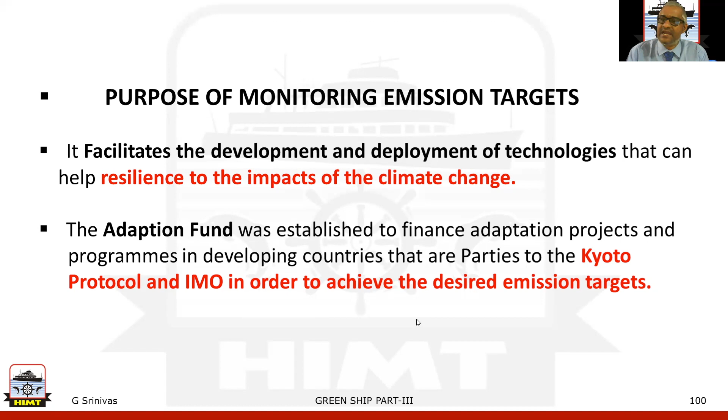Greenhouse effect solution - so what is the solution? How do we reduce this greenhouse effect? Reducing greenhouse gas emissions will require significant effort at the international, national, and local levels. First and foremost, we must slash fossil fuel production, consumption, and pollution by ramping up our use of clean, future marine fuels, renewable energy, and energy efficient technologies, and by investing in fuel efficient and electric vehicles.

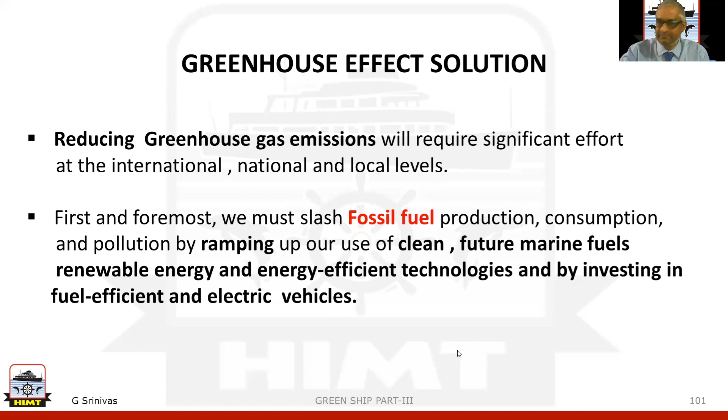Here vehicles refers to ships. So we must end fossil fuel subsidies and better leverage cap and invest programs, carbon pricing and carbon capture, which includes storage and utilization technologies that catch the carbon dioxide from emission sources like power plants or directly from the air, and permanently bury it underground or in the seabed, or convert it into other materials. As individuals, we must commit to cutting carbon in our daily lives.

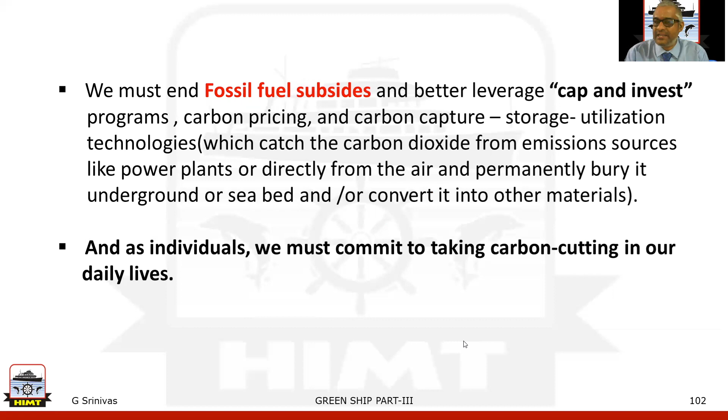Here you can see an image of carbon capture. CO2 is captured and then transported through pipelines from the vessel and permanently stored under the seabed. It is stored permanently in reservoirs around 1000 to 2000 meters below the seabed.

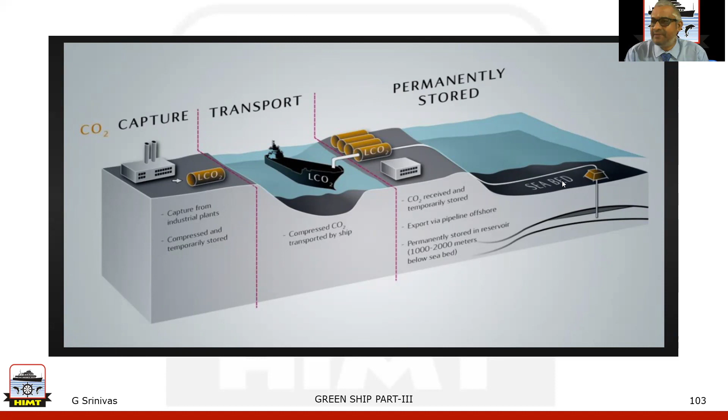The solutions above for greenhouse gas emissions are required to achieve objectives as per the Intergovernmental Panel on Climate Change, IPCC: decrease greenhouse gas pollution by 45% from 2010 levels by 2030, and reach net zero emissions by the year 2050. As per the IMO, International Maritime Organization, agreed in April 2018, the drafted greenhouse gas strategy aims to decrease carbon intensity by 40% by 2030, pursuing efforts towards 70% by 2050, and 50% annual greenhouse gas reduction by 2050. These are the objectives as per the IPCC and IMO.

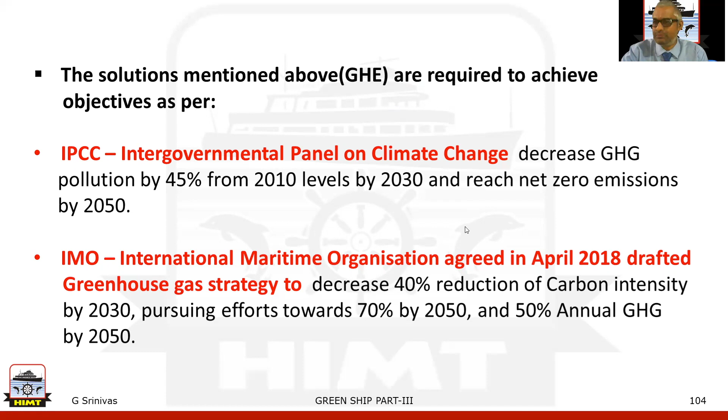IMO levels of ambition. IMO's initial strategy identifies levels of ambition for the international shipping sector, noting that technological innovation and the global introduction of alternative fuels and energy sources for international shipping will be integral to achieving the overall ambition. The reviews should take into account updated emission estimates, emission reduction options for international shipping, and the reports of the IPCC as relevant.

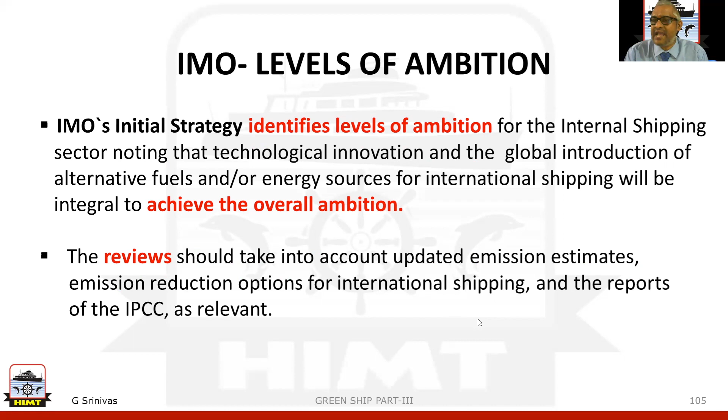Levels of ambition directing the initial strategy are as follows. Number 1: carbon intensity of the ship to decline through implementation of further phases of the EEDI for new ships, to be reviewed with the aim to strengthen the energy efficiency design requirements for ships, with percentage improvement for each phase to be determined for each ship type as appropriate. As we all know, during the MEPC 76 session, held in June 2021, the phases regarding the EEDI have been implemented.

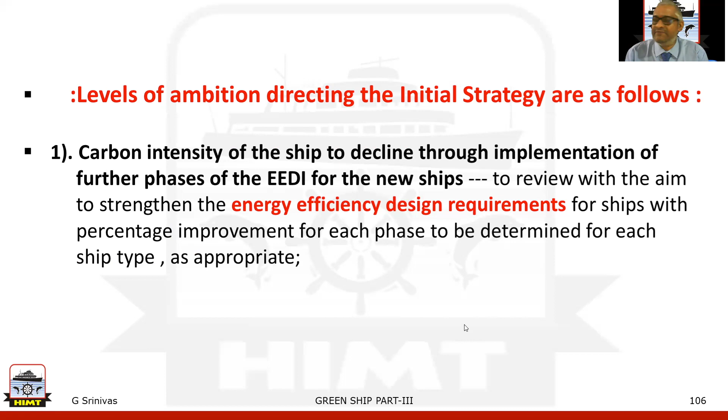Which year it has been implemented, we'll see in the coming slides. Number 2: carbon intensity of international shipping to decline, to reduce carbon dioxide emissions per transport work as an average across international shipping by at least 40% by the year 2030, and pursuing efforts towards 70% by 2050, compared to 2008.

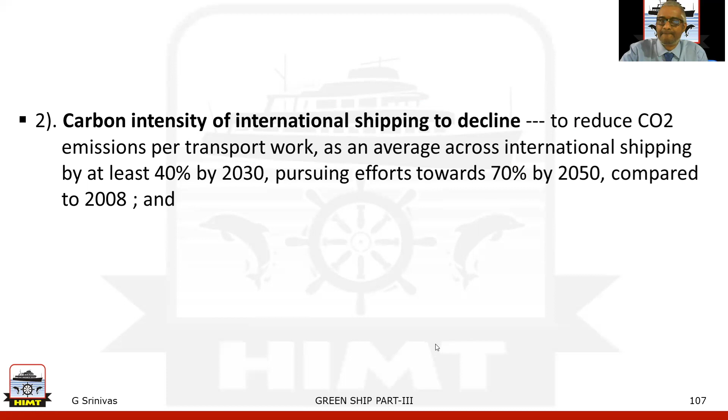Third, greenhouse gas emissions from international shipping should peak and decline: to peak as soon as possible and reduce total annual greenhouse gas emissions by at least 50% by 2050 compared to 2008, while pursuing efforts towards phasing them out, as called for in the vision, as a point on a pathway of CO2 emissions reductions consistent with the Paris Agreement temperature goals.

So what is the vision? IMO remains committed to reducing greenhouse gas emissions from international shipping and, as a matter of urgency, aims to phase them out as soon as possible.

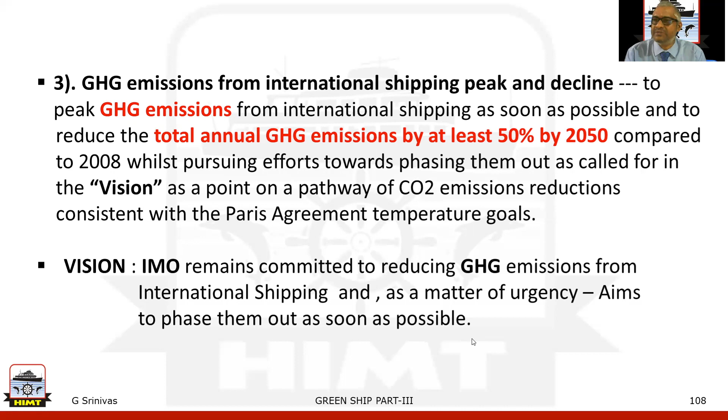So what is business as usual emissions? The Intergovernmental Panel on Climate Change defined a business-as-usual baseline case as the level of emissions that would result if future development trends follow those of the past and no changes in policies take place. So basically, business as usual means no policies are taken into account and no innovative technologies are implemented.

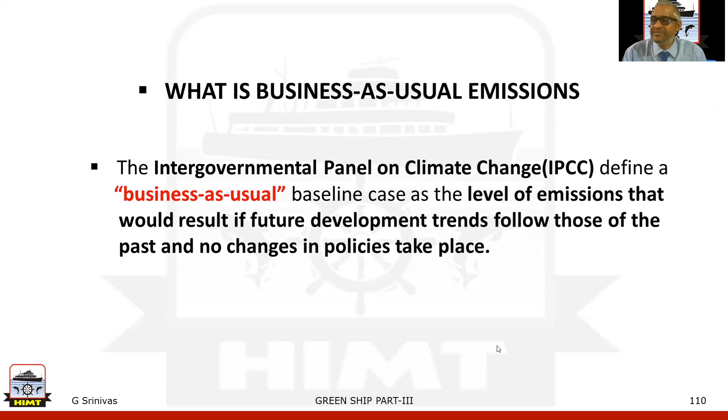So what will be the future emissions? Under IPCC business-as-usual emissions of greenhouse gases, there is a rate of increase of global mean temperature during the next century of about 0.3 degrees centigrade per decade. This is greater than that seen over the past 10,000 years.

The scenario in developing countries has been a debate issue in climate change negotiations. Such a definition will lead to an underestimation of business-as-usual emissions of developing countries, and thus an underestimation of mitigation efforts. If mitigation efforts have not been implemented for the reduction of CO2 emissions, then business-as-usual emissions will gradually increase.

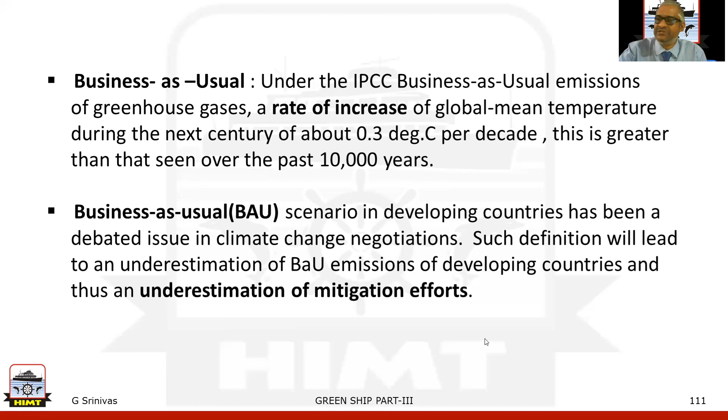The business-as-usual pathway CO2 emissions from international shipping under the strategy is shown in the figure, and compared to the business-as-usual emissions pathway, a range of emission pathways are possible under the IMO's initial strategy.

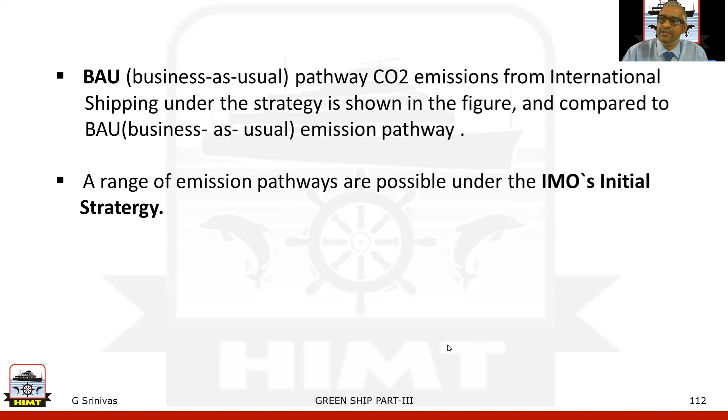So here you can see the figure. The y-axis is carbon dioxide in million tons per year, and the x-axis is years from 2010 to 2075. The black line represents business-as-usual emissions of carbon dioxide, at 101 gigatons.

With respect to the blue and green lines: the blue line represents the IMO's initial greenhouse gas strategy minimum ambition, at 40 gigatons, and the maximum ambition is about 28 gigatons.

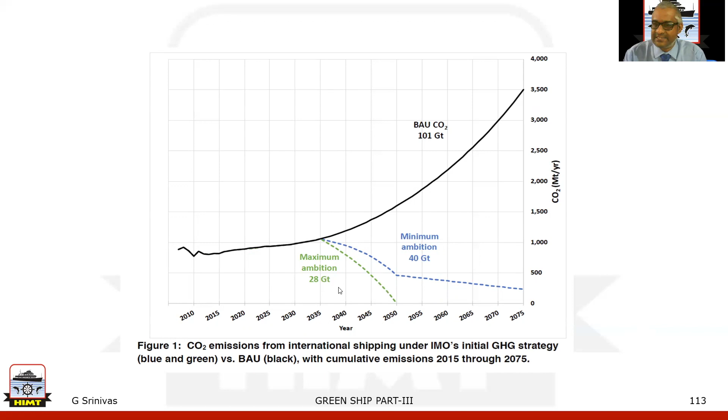As we have seen in the figure, the blue line is the minimum ambition implied by the strategy, and it reflects a 40% carbon intensity reduction by the year 2030.

The green line is the maximum possible ambition implied by the strategy. It's driven primarily by the goal to pursue phasing out greenhouse gas emissions from international shipping at a pace consistent with the Paris temperature goals.

So basically, the blue and green lines represent the IMO's initial strategy and levels of ambition, and the green line is the vision of the IMO.

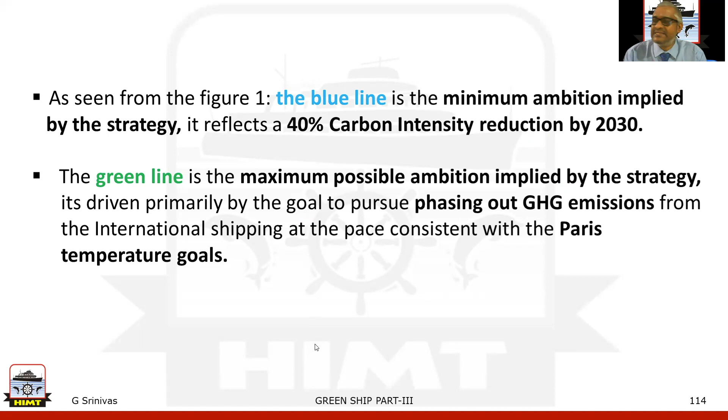The strategy implies cumulative CO2 emissions of between 28 to 40 gigatons from international shipping from 2015 to 2075, compared to business as usual of more than 100 gigatons over the same period. This is the reason why the IMO has taken action for the reduction of greenhouse gas emissions, and various technologies are there.

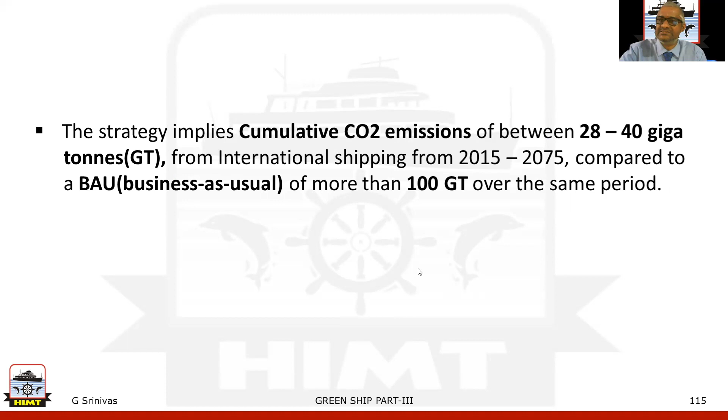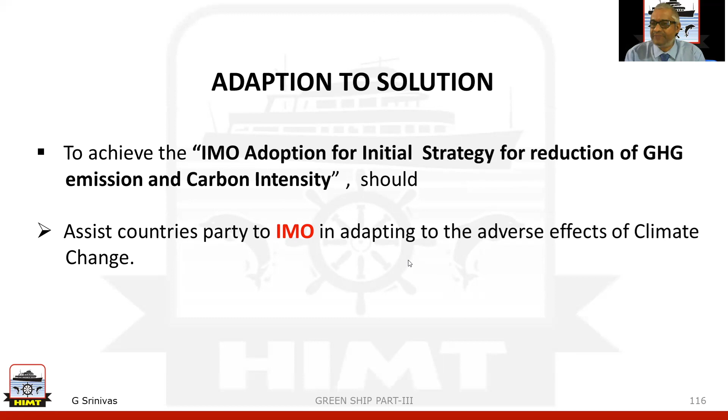In adopting solutions to achieve the IMO's initial strategy for the reduction of greenhouse gas emissions and carbon intensity, countries party to IMO should be assisted in adapting to the adverse effects of climate change, facilitating the development of new programs and deploying new technologies that can help increase resilience to the impacts of climate change, and to achieve the desired objectives of the IMO initial strategy on reduction of greenhouse gases and carbon intensity.

So new programs and technologies developed for the reduction of greenhouse gas and carbon intensity, and to reach zero emissions, are as follows: number one, a wide variety of design, operational, and economic solutions, which includes a combination of design, operational, and economic solutions particularly for the shipping sector; number two, various green technologies; number three, compliance and enforcement factors, which contribute to lower fuel cost and energy savings.

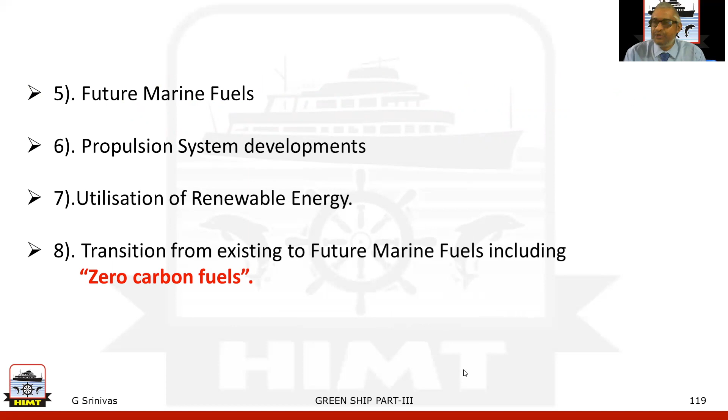Number four, adopting methods to improve propulsion efficiency. Number five, future marine fuels. Number six, propulsion system developments. Number seven, utilization of renewable energy. And number eight, the last one, transition from existing to future marine fuels, including zero-carbon fuels. We will discuss all these eight points later.

Innovative technologies, calculation of efficiency and verification. The verification of innovative energy efficiency technology is a complex process as documented in the IMO guideline. This is an interim guidance document, expected to evolve over time with experience gained from using these technologies.

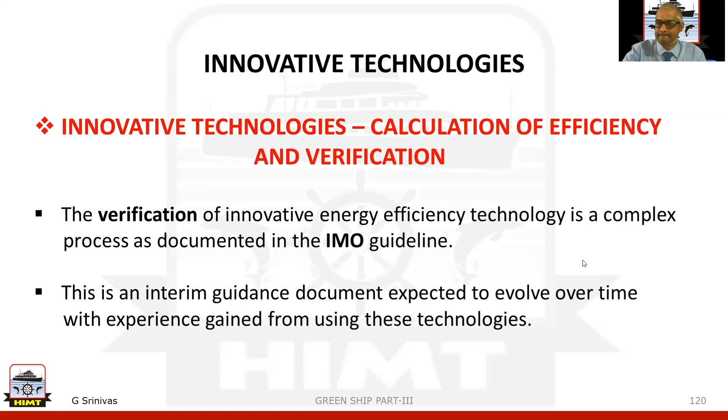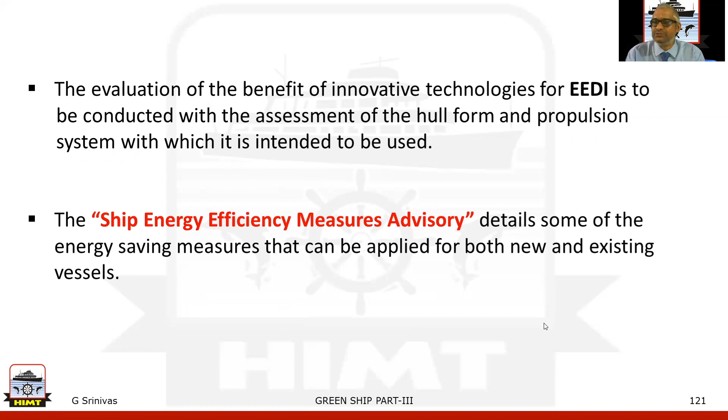The evaluation of the benefit of innovative technologies for EEDI is to be conducted with the assessment of the hull form and propulsion system with which it is intended to be used. And the ship energy efficiency measures advisory details some of the energy saving measures that can be applied for both new and existing vessels.

Potential energy savings are estimated in terms of reductions in engine specific fuel consumption, reduction in propulsion fuel consumption, and reduction in overall vessel fuel consumption. So that is the potential energy savings. And these estimates are based on values derived from vendor and manufacturer claims, industry reports, practical operating experience, and engineering review.

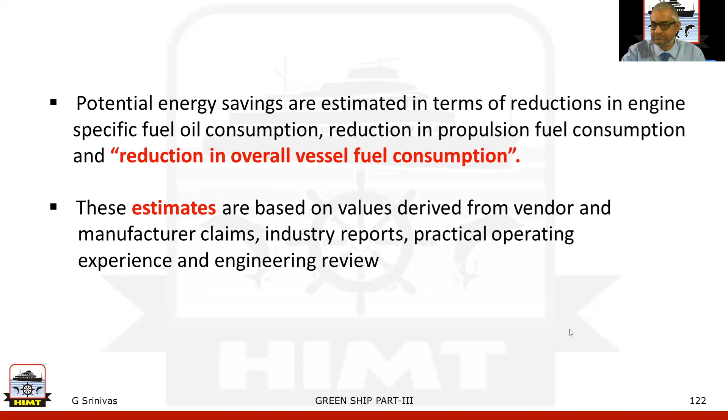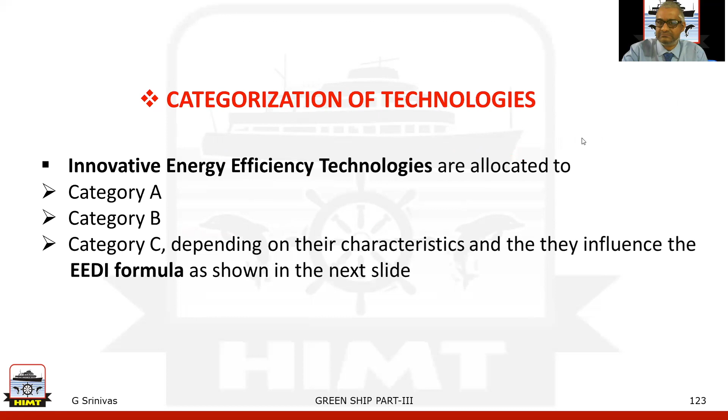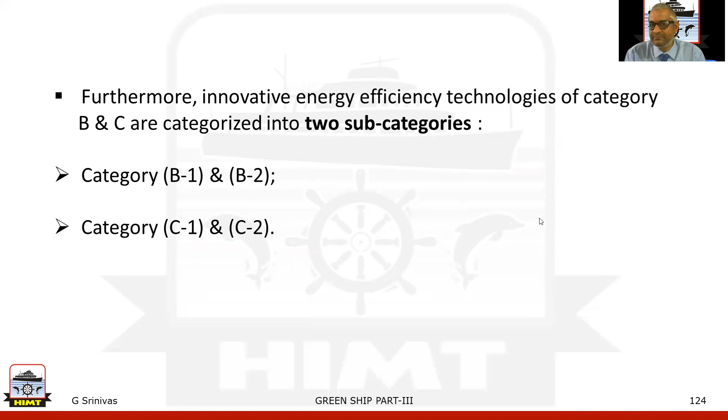So the innovative technologies are categorized into category A, category B, and category C, depending on their characteristics and how they influence the EEDI formula. Furthermore, innovative energy efficiency technologies of category B and C are again categorized into two subcategories: category B into B1 and B2, and category C into C1 and C2.

Category A technologies directly influence and shift the ship's speed power and can change the combination of propulsion power and the reference speed. For example, technologies at constant reference speed can lead to a reduction of propulsion power, or for a constant propulsion power that could lead to an increased reference speed.

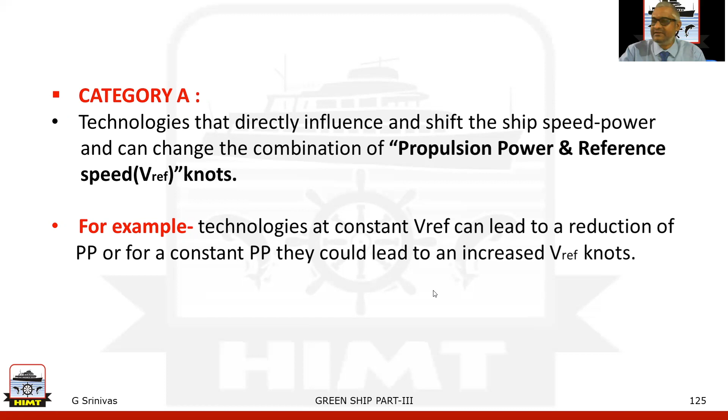These categories cover ESDs, that is energy saving devices, such as pre-propeller fins, ducts, post-swirl stators, rudder fins, and combinations of them, along with low friction coatings, and hull, propeller, rudder optimization efforts that directly impact the ship's hydrodynamic performance.

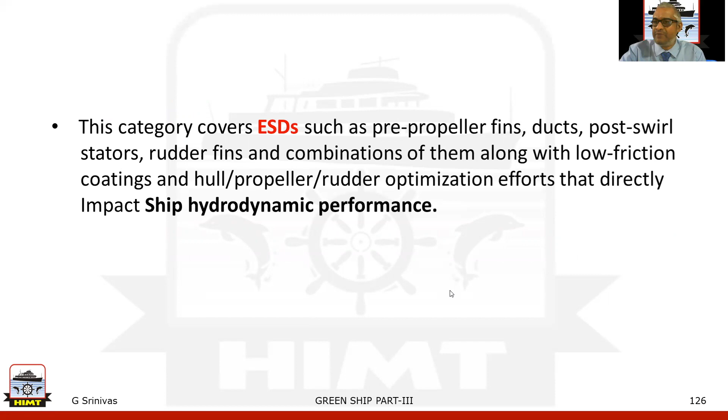Category B, commonly known as fifth term technologies, reduce propulsion power at a reference speed but do not generate electricity, and the saved energy is counted as P efficiency.

Category B1: technologies which can be used at all times during the operation, for example hull air lubrication, and thus the availability factor should be treated as 1.0. So the saved energy, P efficiency in kW, indicates 75% of the installed power for which innovative technology contributes to ship propulsion.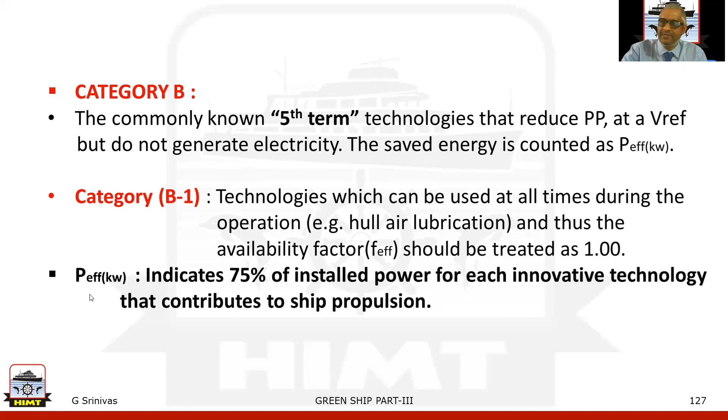Category B2: technologies which can be used at their full output only under limited conditions and periods, for example wind power, and the setting of availability factor should be less than 1.0.

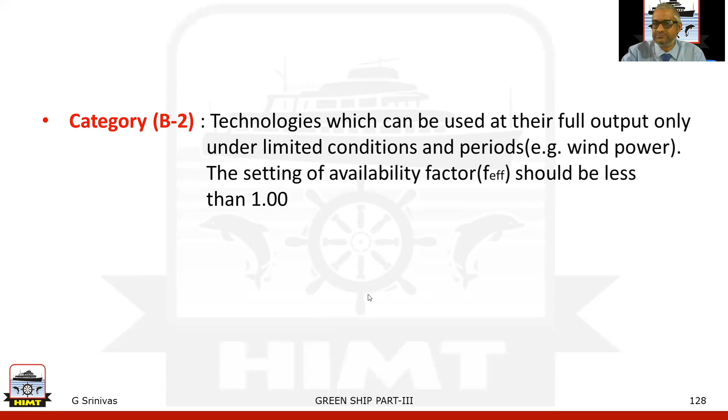Category C, commonly known as fourth term technologies, generate electricity, and the saved energy is counted as auxiliary power reduction due to use of innovative electric power generation technologies.

Category C1: technologies which can be used at all times during the operation, utilizing waste heat recovery, and thus the availability factor should be treated as 1.0.

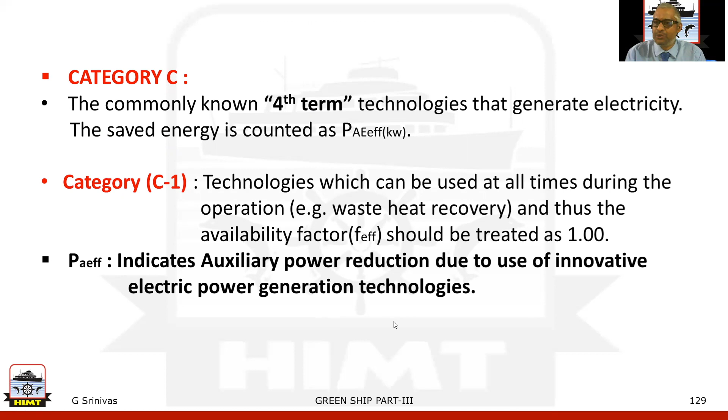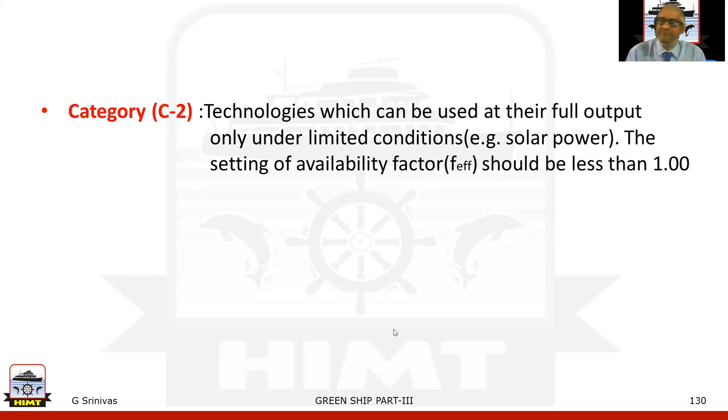Category C2: technologies which can be used at their full output only under limited conditions, for example solar power, and the setting of availability factor should be less than 1.0.

Here you can see the innovative energy efficiency technologies EEDI formula. EEDI is equal to main engine emissions plus auxiliary engine emissions plus shaft motor emissions, minus fourth term efficiency technologies, minus fifth term efficiency technologies, divided by the cargo transport.

Here you can see in the table the various innovative technologies divided into category A, B, and C. Each entry in the table formula is color coded, corresponding to these color codes. Whichever color codes are red will indicate over here, and whichever are blue will be applicable over here. Same with the one in gray, fifth term efficiency technology: air lubrication and wind propulsion. And the shaft motor emission minus fourth term efficiency technologies are in black: waste heat recovery and solar power.

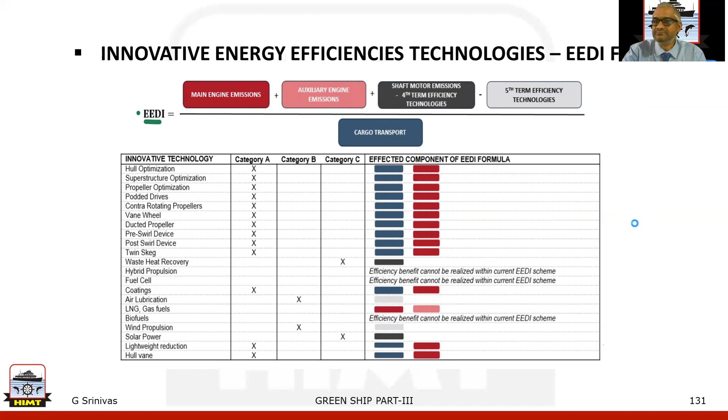Highlighting the various innovative technologies and solutions adapted for the reduction of greenhouse gas emissions. Number one, wide variety of design, operational and economic solutions for greenhouse gas reduction potential.

Achieving the goals of the initial IMO greenhouse gas strategy will require a mix of technical, operational and innovative solutions applicable to ships. Some of them, along with an indication of their approximate greenhouse gas reduction potential, are highlighted as given.

5 to 15% from power and propulsion systems, and 5 to 50% from fleet management, logistics and incentives, 1 to 10% from voyage optimization, 2 to 50% from concept, speed and capability, 50 to 90% from fully electric.

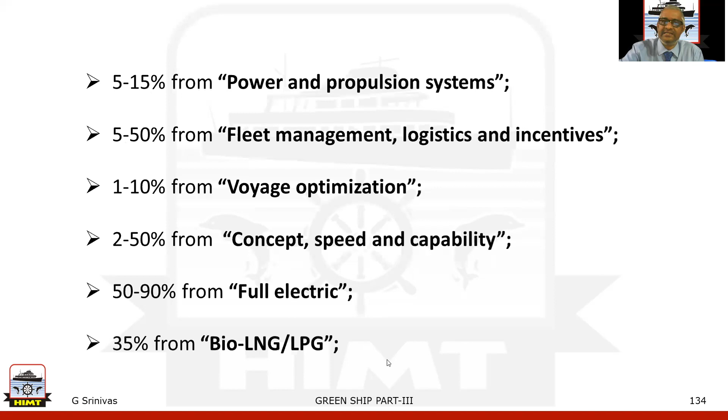35% from bio, LNG and LPG, 90% from third generation biofuel, and 80 to 100% from hydrogen and other synthetic fuels, 1 to 10% from energy management, 2 to 20% from hull and superstructure, and up to 75% from extensive speed optimization. So all these percentages represent a combination of technical, operational and innovative solutions.

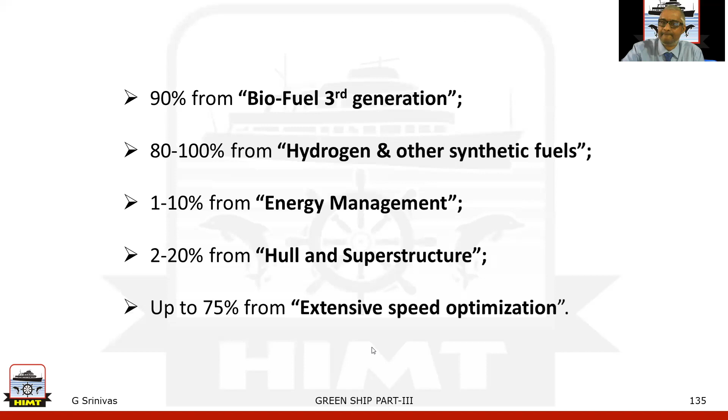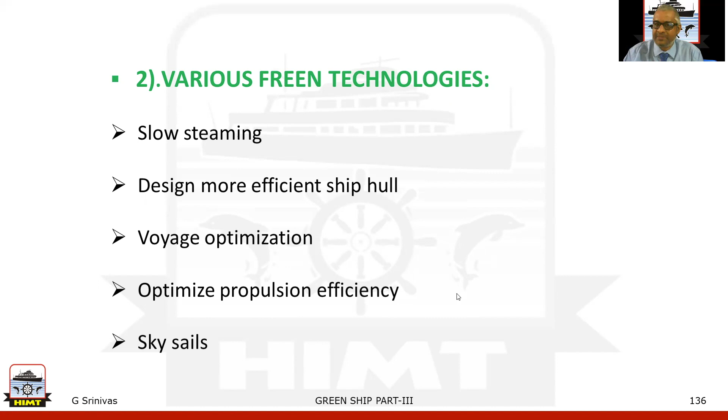Second one, various green technologies: slow steaming, designing more efficient ship hulls, voyage optimization, optimizing propulsion efficiency, and sky sails.

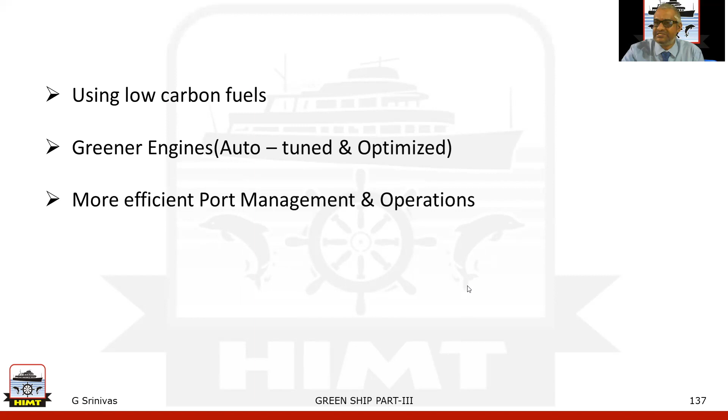Waste heat recovery systems, scrubbing towers, use of marine fuel with low sulfur content, IMO compliant. Scrubbing towers will be used in case you are using fuel with sulfur content of 3.5%.

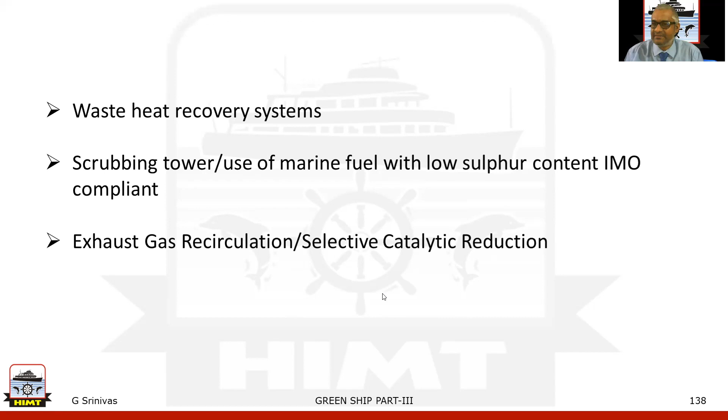Exhaust gas recirculation and selective catalytic reduction for the reduction of NOx, trim optimization, cooling systems, advanced turbochargers, advanced propulsion systems, and renewable energy.

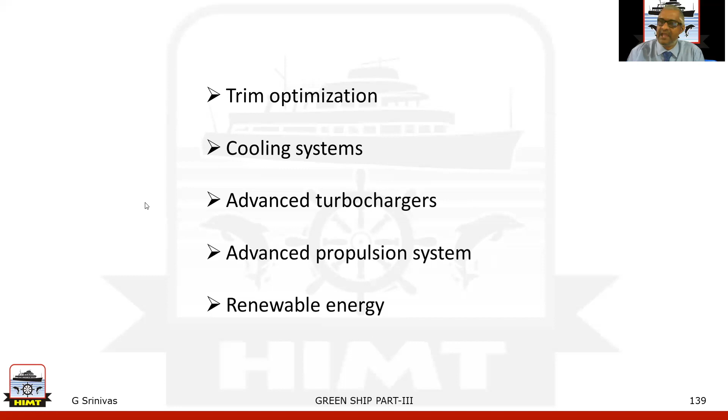Number 3, compliance and enforcement factors contributing to lower fuel cost and energy savings. First one is hull condition.

Control of the factors given below can give fuel optimization up to 7%. The factors are vessel size, hull fouling, hull damage, and hull paint.

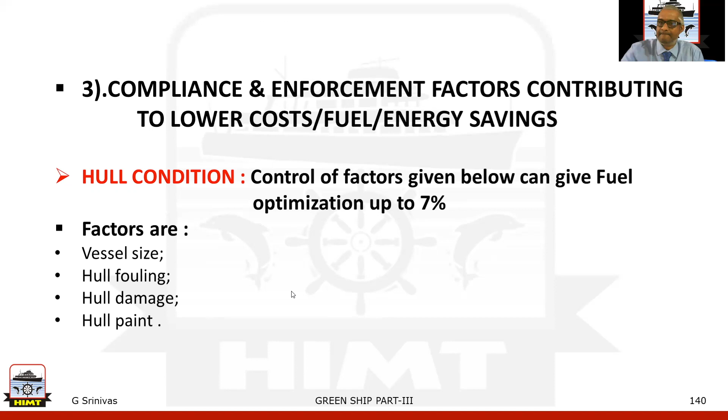Engine condition. Control of the factors given below can give fuel optimization up to 5%. The factors are shaft, engine fuel consumption, revolutions per minute, thrust, and fuel rate.

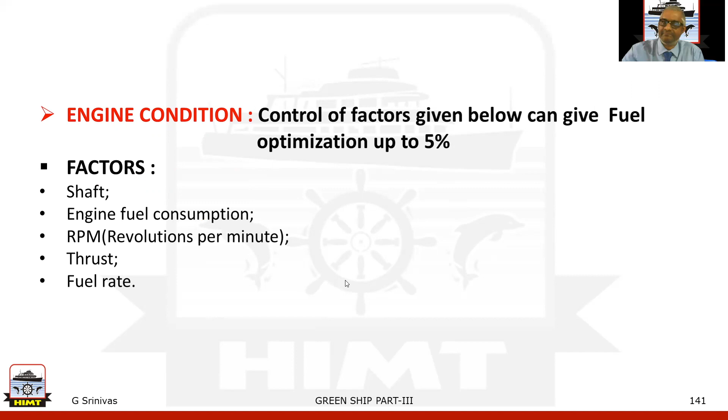Trim and draft. Monitoring of the factors given below will provide up to 5% fuel savings. The factors are draft, trim, and stability.

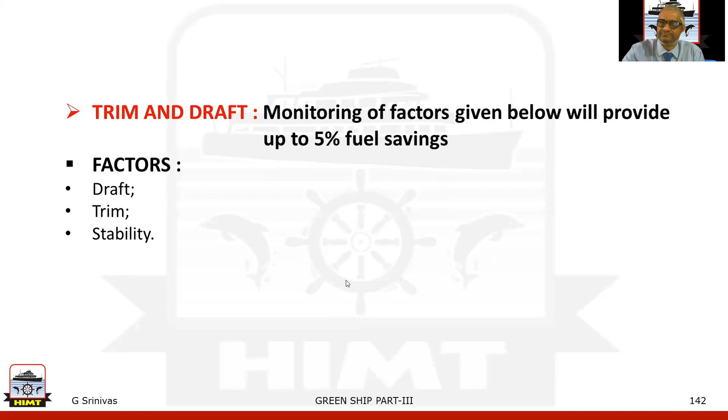Weather conditions. Route planning based on weather conditions will give up to 3% optimization. The factors are air and water temperature, cloud cover and ice cover, humidity, current speed and direction, gust, swell direction, swell height and period, wave direction, visibility, and sea level.

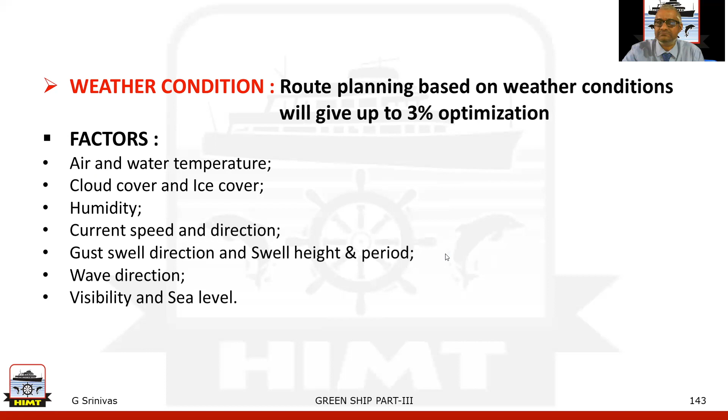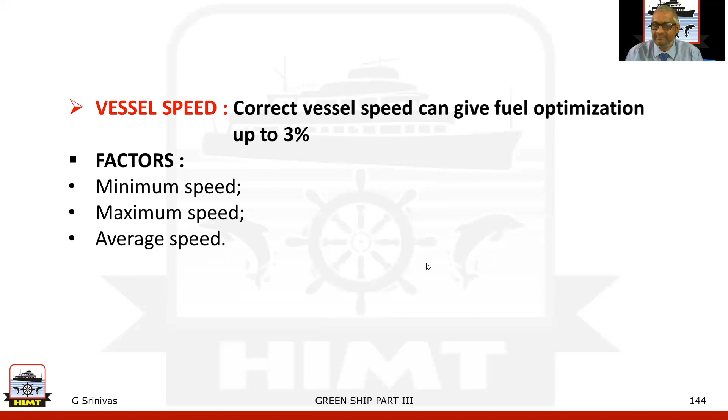Vessel speed. Correct vessel speed can give fuel optimization up to 3%. The factors are minimum speed, maximum speed, and average speed.

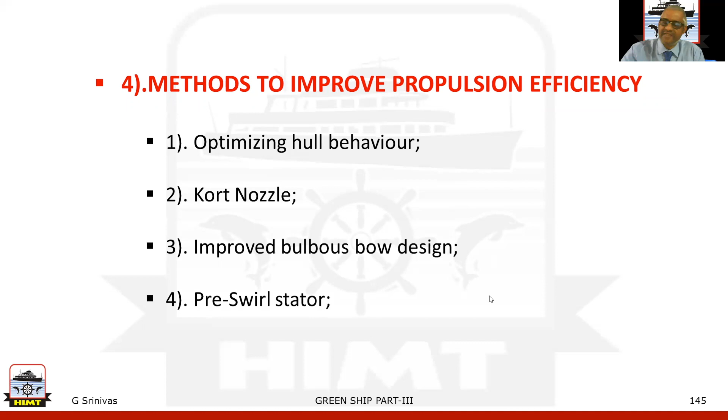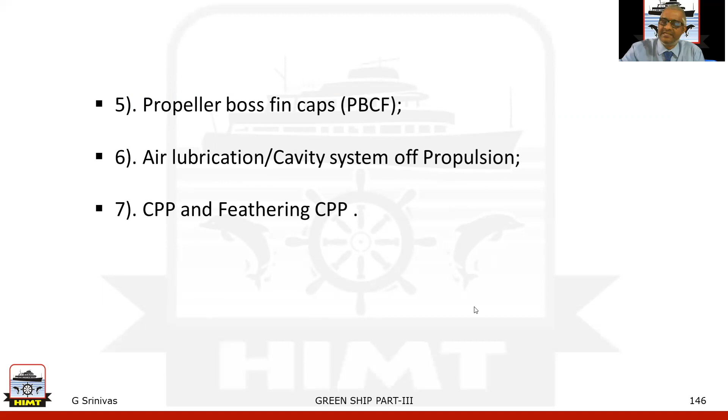Number 4, methods to improve propulsion efficiency: optimizing hull behavior, Kort nozzle, improved bulbous bow design, pre-swirl stator, propeller boss cap fins (shortly known as PBCF), air lubrication or cavity system of propulsion, CPP and feathering CPP, controlled pitch propeller.

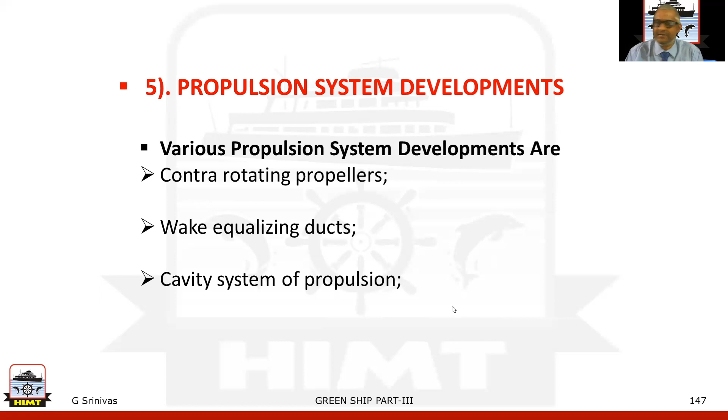Number 5, propulsion system developments: contra-rotating propellers, wake equalizing ducts, cavity system of propulsion, water jet propulsion, electric propulsion, and power take-off and power take-in systems in conventional diesel-electric propulsion.

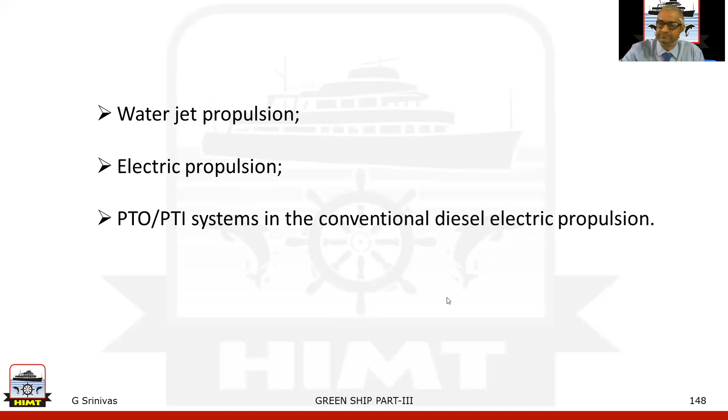Number 6, various renewable energy: marine solar power system, harnessing wind and solar power concept, fuel cell propulsion. Types of fuel cells are alkaline fuel cell, proton exchange membrane fuel cell, direct methanol fuel cell, phosphoric acid fuel cell, molten carbonate fuel cell, and solid oxide fuel cell. The final one is hydrogen and fuel cell.

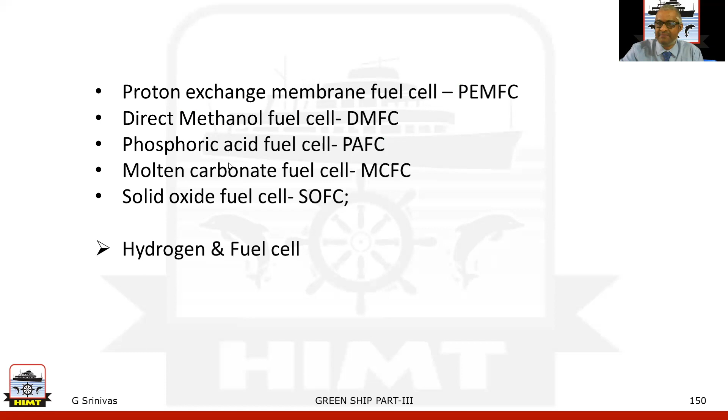All these—proton exchange membrane, direct methanol fuel cell, phosphoric acid fuel cell, solid oxide fuel cell, and alkaline fuel cell—all come under the category of types of fuel cells.

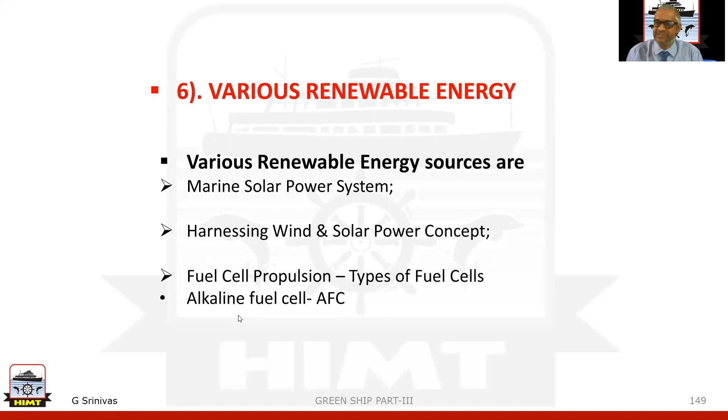Number 7, transition from existing to future fuels. Putting shipping into the wider energy context as we transit to alternative energy sources and technologies, evolving from well-to-wake to blade-to-wake and wave-to-wake.

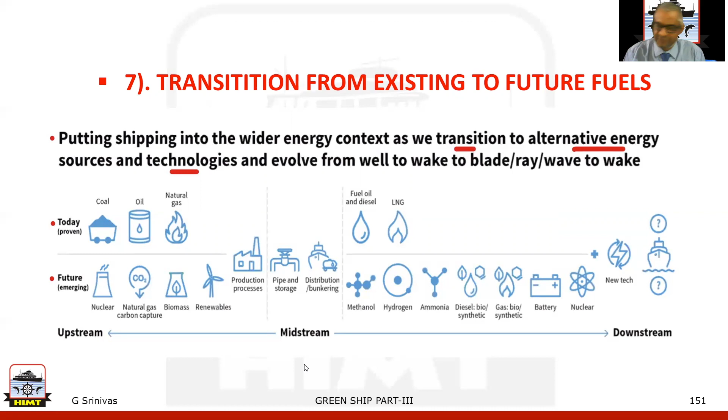Number 8, future marine fuels, pathway to decarbonization. IMO has developed a target of a minimum 50% reduction in greenhouse gas emissions by the year 2050. Ship owners have alternate fuel options to help them meet IMO's ambitions, each with its own advantages and challenges.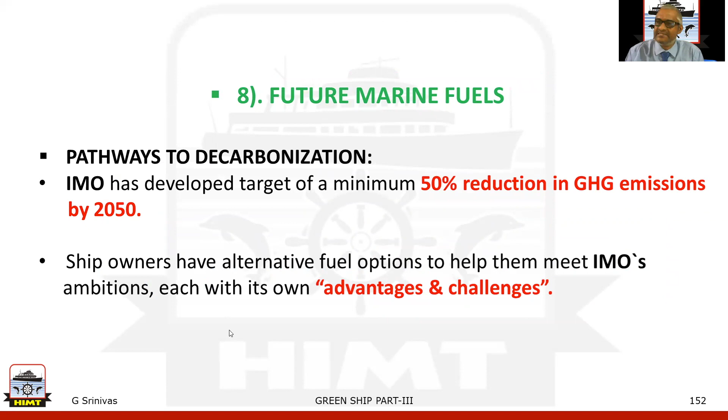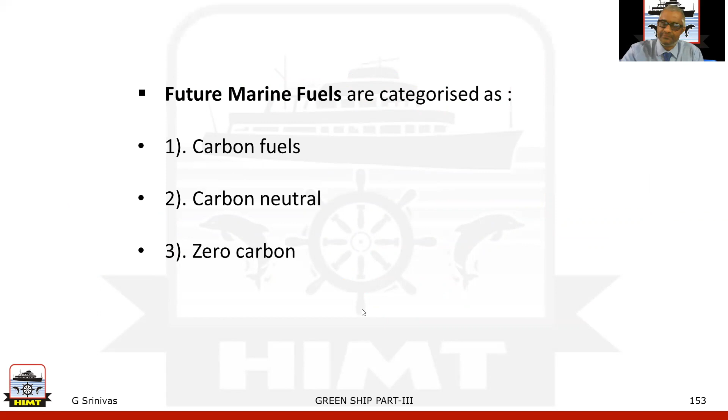Future marine fuels can be categorized as: number 1, carbon fuels; number 2, carbon neutral; and number 3, zero carbon. So we'll see what carbon fuel, carbon neutral, and zero carbon are.

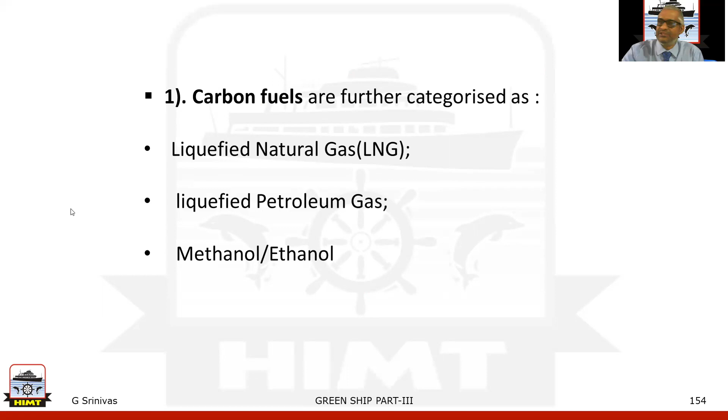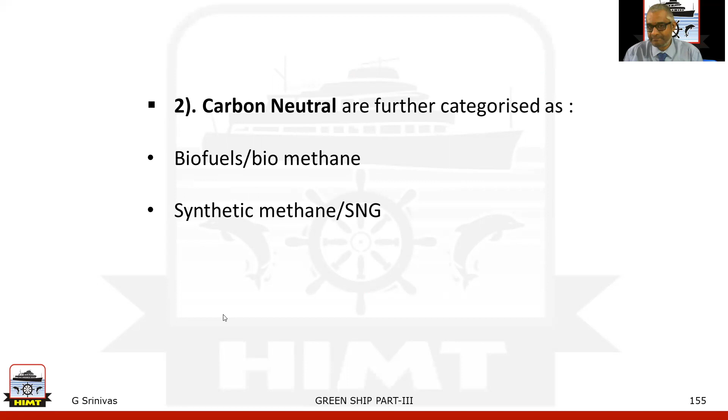Carbon fuels are further categorized as liquefied natural gas, liquefied petroleum gas, methanol, and ethanol. Number 2, carbon neutral are further categorized as biofuels, biomethane, synthetic methane, and SNG. Number 3, zero carbon are further categorized as hydrogen and ammonia.